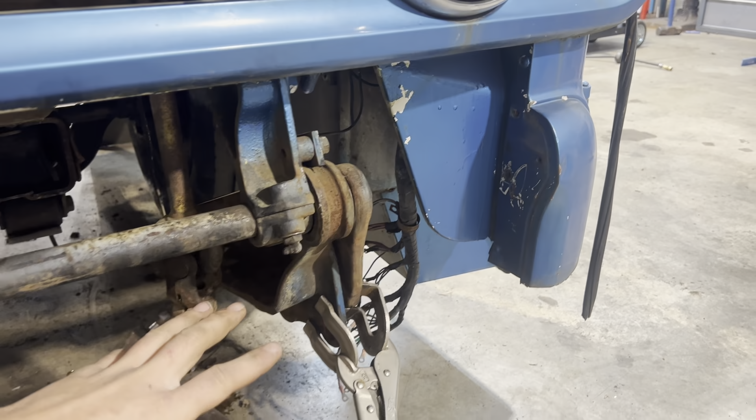All right, so if you have not been with us yet, this is a 1971 GMC COE cab. It was a fire truck. It has a hinge in the front to tilt the cab. That's how you used to be able to access the engine. That's how I'm going to mount it. So this is actually a pretty cool setup. So this is the torsion bar and the hinge. So this bar that goes across is a spring.

It's a torsion bar that basically how it's going to work is this bracket coming from the cab is hooked to the subframe, and it's not bolted tight to this bar. It's actually pivoting on this bar right here. So this is the mount to the cab on both sides. You can see that. And then this is a hinge that bolts to the frame. Notice that this bracket looks much different from this bracket. This one is completely different. It actually also locks the torsion bar in.

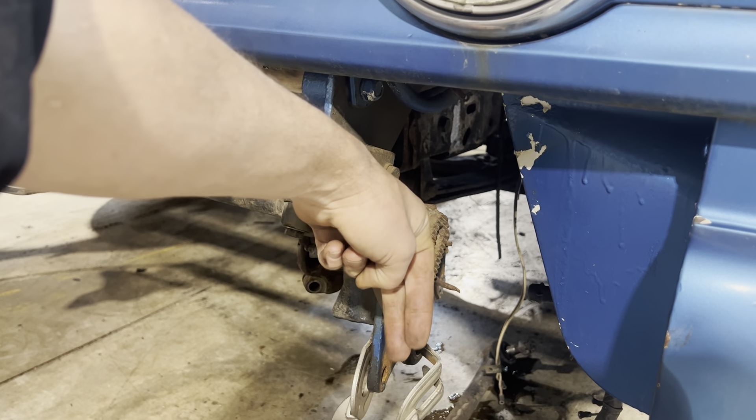So this link pivots like this as the cab tilts. So if we were to tilt the cab, this bar would go like this, and then we would be able to tighten it against this locked kind of serrated slot here. There's a piece of hardware that locks that in. And then once that's locked, well, the cab is tilted. When the cab comes back down, it will load this spring and take the weight of the cab. That's so that a person could tilt this super heavy cab up on its end because it's got that spring-loaded bar.

So, ooh, this is a dirty camera. Hold on.

Little better. So yeah, that's a very important bracket, and it's asymmetrical. It's not the same on both sides. So I've got to kind of figure out a way to make that all mount very strong, as well as this is our steering link. So it's telescopic because as you tilt the cab, this steering would get longer or shorter. And it is pretty close to where I want to mount the steering box.

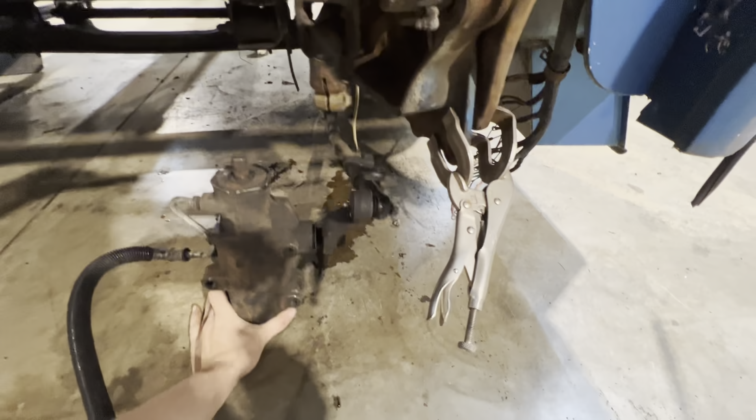So this steering box will be basically vertical, facing forward. These are the threaded holes that mount it. So right now those are facing forward. So I've got to be able to have a plate that goes sideways that I can bolt the steering box on. So my plan to start is to get a plate going from the outside of this frame rail that comes down. Might be able to see it easier this way.

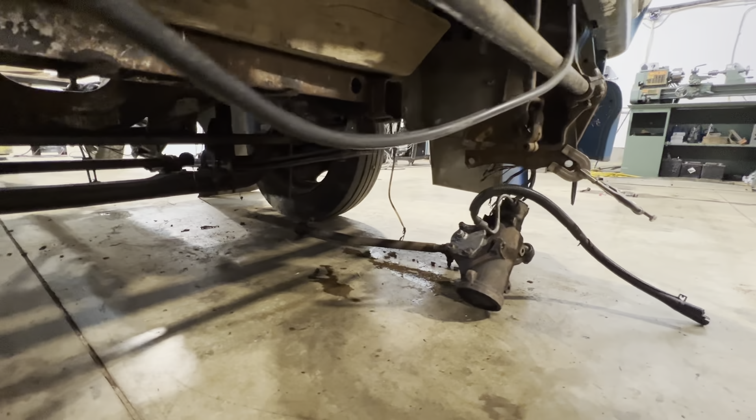So there's the frame. I'm going to make a plate that comes down and forward that would mount a bumper, but it will have enough meat in it, being our main source of strength, because it's going to be a 1/4-inch plate that comes down, has maybe a bend at the end so that the bumper can bolt on, and then I can build off the side of that next to get the top of this bracket.

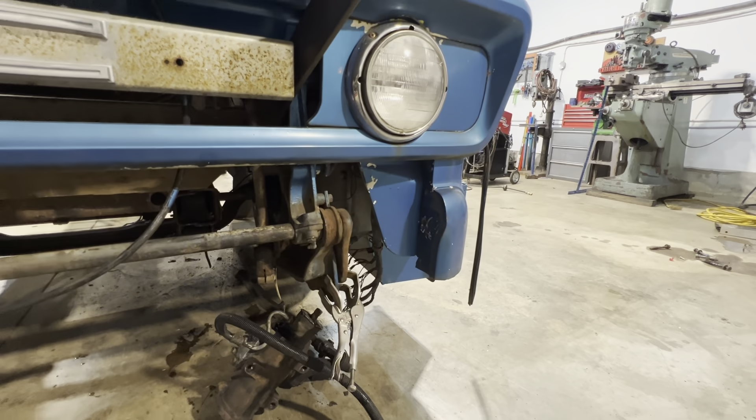So once that forward plate from the frame is here, I'll be able to make a plate and a template to make a side plate that bolts on to that part of the hinge and then somehow tie in these bolt holes. So one thing leads to another, and that's kind of how you have to look at a problem like this, or that's not how you have to do it, that's how I like to do it, is start with what you know.

I know I've got to mount a bumper. I know the strongest part of the frame is this outside piece here with 1/4 inch plate. So I'm going to make a main plate that the rest of the pieces can branch off of. And that goes for the steering box as well. I'll be able to figure out the steering box based on that plate as well.

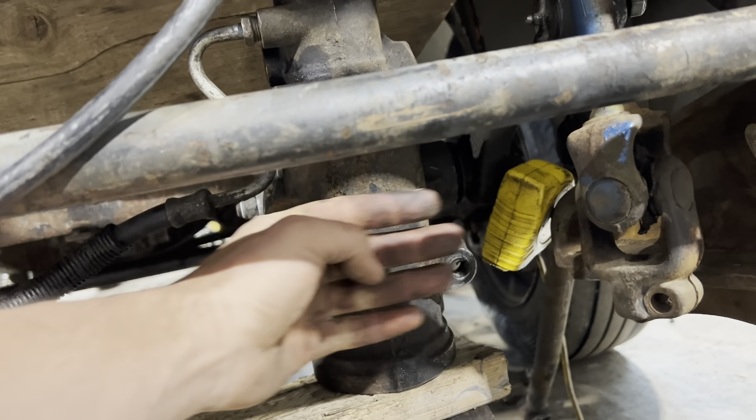Okay, so I kind of have the steering box mocked up where I would like it to be. So you can see it's turned sideways. The lines are coming out of the side of it. It's bolting on at the front. So I'm gonna have a plate coming off of this main plate that I was talking about that will mount the steering box, but I need this in place so that I can see where the hole will be either in the plate that I'm making or it'll be notched underneath to clear where that steering arm comes out.

So you can see that arm kind of fits nicely within the hinge here. I've got the steering box arm all the way forward, so it would be turning right at this point in time. So I've got it all the way forward so I can check the clearances around that hinge anyway. But that's where it's sitting. I've got it tipped forward a little bit. There's the steering arm coming from the top.

I'm not sure if that U-joint will allow it to go that far, but if it does not allow that much angle, then I will have to go to what's called a double U-joint. They have a little bit more angle allowed in them. So I think it'll be okay, but we'll have to see. This is, like I said, a telescopic arm. I'll have to shorten it and then put a different U-joint on the end. I'll probably end up welding it on because I've got the U-joint that came with this box as well,

and make an arm happen. But now that this is in place, I can continue making my template for this first main 1/4 inch plate that's going to come down. It's going to come in between the steering box and this hinge. It's going to come to the bumper mount, but I will build off of it to get these other strong points picked up.

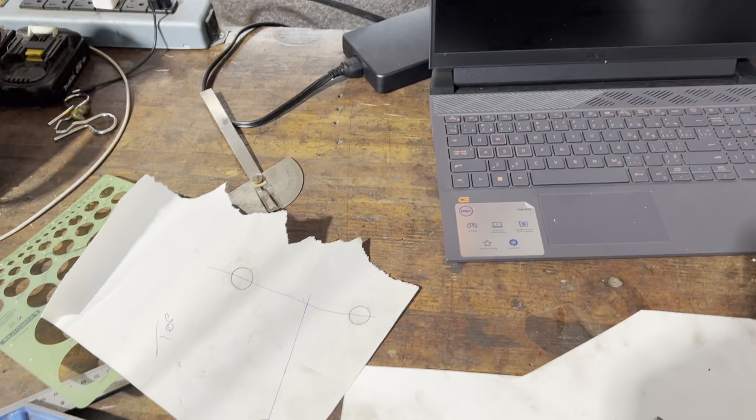So I also took a little tracing, a dirty finger template where you just rub your dirty fingers over top of the frame, and mapped out the steering box holes, and I've made a plate. Anyway, the drawings are for the frame horn, both sides of the frame, and then a center plate for the steering box, and then the other

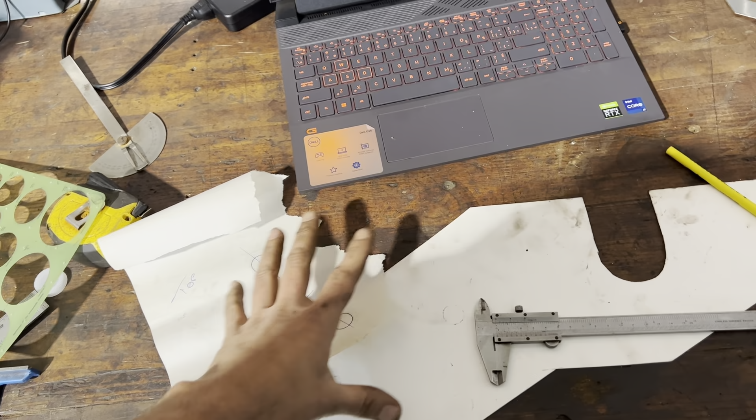frame horn is just going to be another bar, but what has happened is my other computer that runs the CNC, I think that when the power went out, I accidentally ran it on generator power and fried the power source. So I'm going to do a little bit more guessing and a little bit more drawing just by measuring tape and kind of feeling it out. And then I'm going to take all this stuff to ELIO, and he's going to bail me out tonight. He's going to cut everything out, and if it's close, I'll be able to cut it and finagle it and still be able to build the front frame rail and steering box mount.

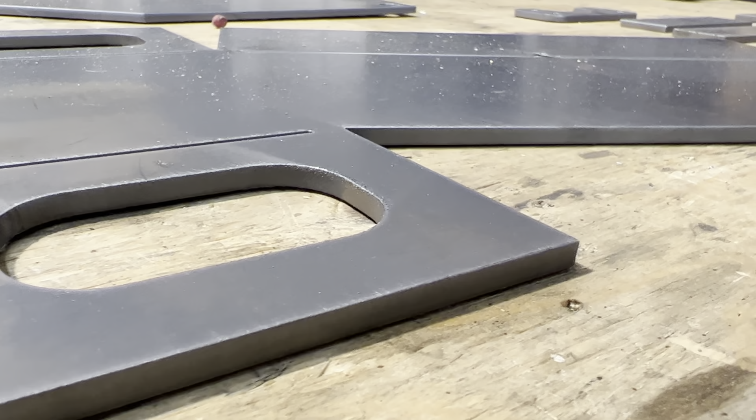All right, so a couple buddies bailed me out today. So I went to go CNC cut some plates, and I was only gonna do a couple plates and then kind of have a look and fit some stuff and then make some more patterns for more plates. I wasn't gonna try and do this all at once. And my CNC is down.

So what happened was, I guess when we had a power outage here and I ran the generator through the panel, I may have put dirty power or generator power through the power supply on the computer. So basically I didn't even know what was wrong with it. I called my buddy Rich, he's my CNC go-to guy, and he figures that my computer's probably okay and it just needs a new power supply, so I won't have to reinstall those programs and do that kind of stuff.

I have a really archaic computer that runs the CNC. It's got like the pin printer plug that plugs into the CNC, so it might be time to upgrade.

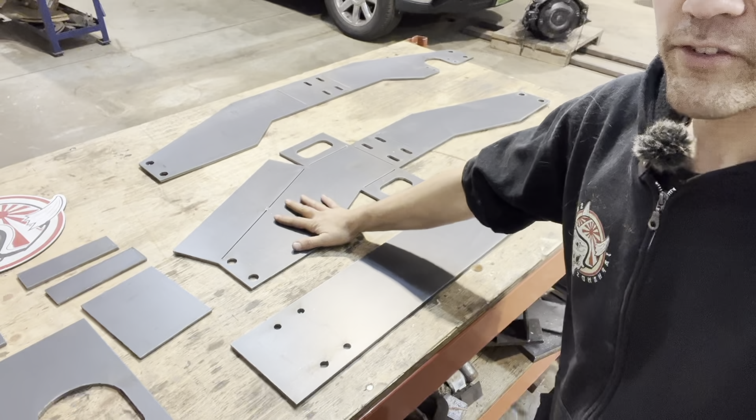Basically, I just drew that one template that you guys saw me draw, and then did a bunch of measuring and tried to visualize cardboard box flap style how to build these front frame horns. That's what this is. This will fold into a frame horn. This will fold into a frame horn. One of them is wider than the other because the steering box is meant to slip inside there. So I kind of made provisions for that.

Like this is where the steering box is going to come through the frame. And I made a little plate. I don't even know if this stuff's going to work, guys, but this is just kind of thoughts that I had. So we're going to see now. I'm going to stick this together and tack it all up.

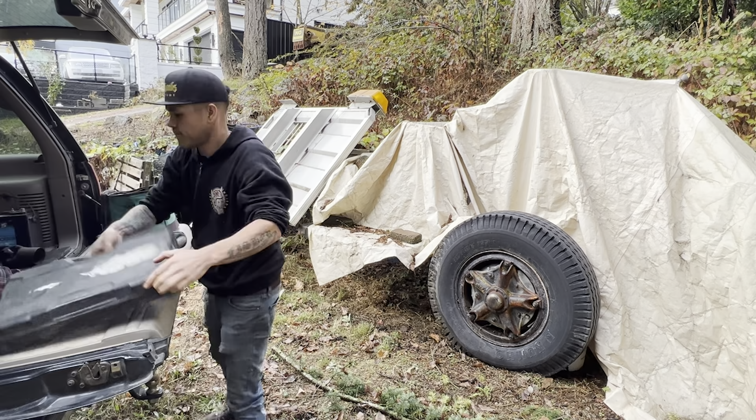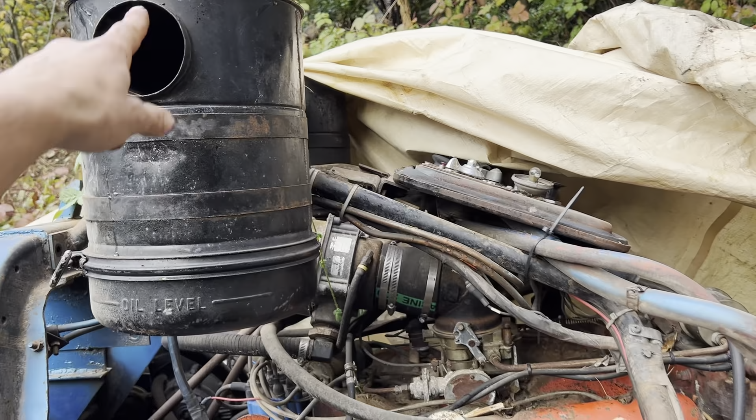Look at how massive this thing is, man. I don't know if you can even tell in the video, but it is gigantic. Like, this is 6 feet tall right here off the ground. That is a gigantic gas V8. GM's largest gas V8 they ever produced was in this truck. All in really crazy good shape.

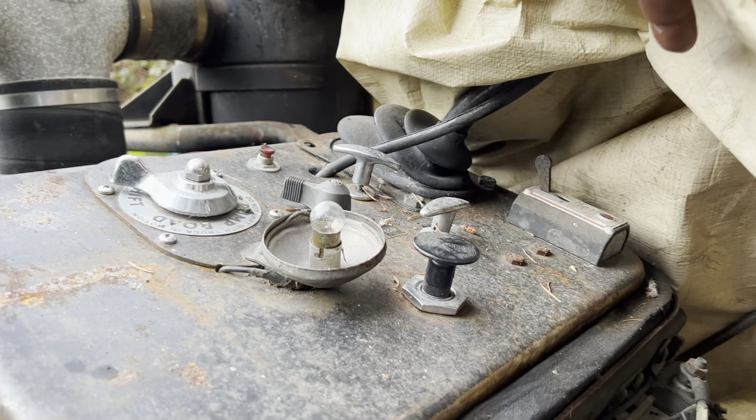This is actually inside the cab. This is like your splitter and your shifter and all that kind of stuff. Super neat. But this is the bar I need right here. I don't need the whole thing, but I do want this pin, this latch. So I'll just start cutting it off.

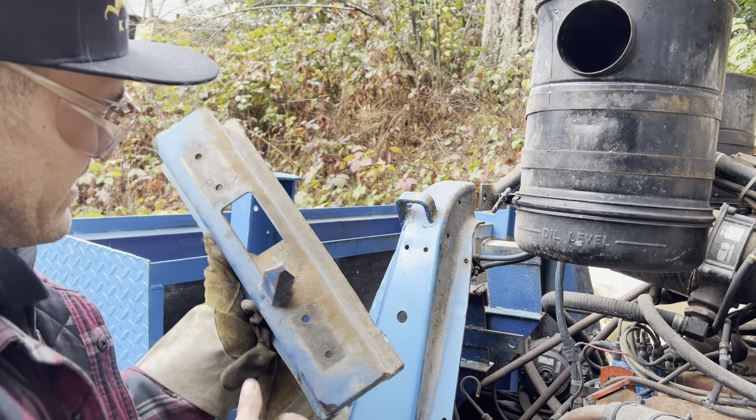Here it is, got the piece I needed. Saves me a bunch of time because obviously it's got the holes and mounting locations and dimensions of exactly what I would need to fabricate. So this is awesome. So thanks, boys.

It gets hung up on this little thing here. If I put it on faster, it goes. Very cool.

Man, thanks for showing me around again, Warren. Yeah. I really appreciate it. Yeah, it's a different kind of house here. It's just beautiful. Your work is amazing. Yeah.

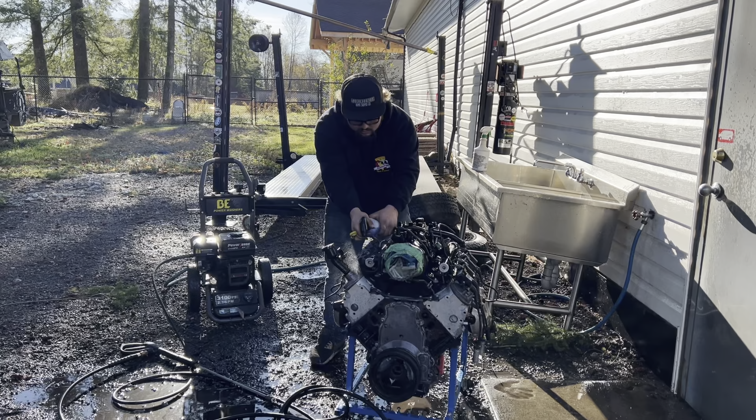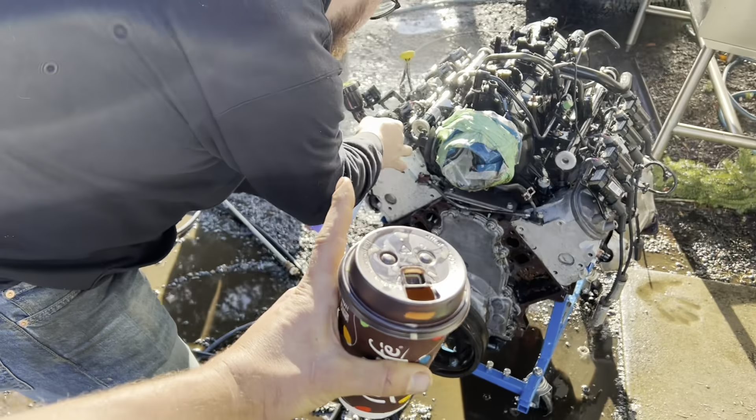What's that stuff, man? It's called the blue stuff. It's like an aluminum brightener or metal brightener. It just eats everything away, cleans it pretty good. He's alternating with that and the Super Clean purple stuff, degreaser. That's a metal brightener, so it's helping clean that aluminum and pull any of the dirt out. It pulls all of the porosity out of the metal, like all the oils and everything.

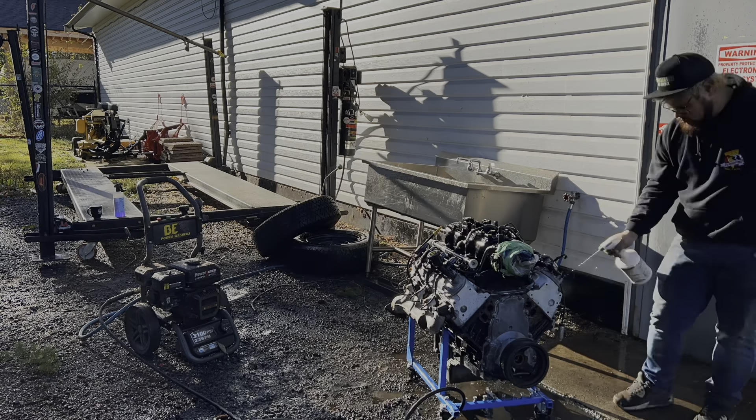Show up. Yeah, we're here. What's up, Brent? Esther, they're in the house.

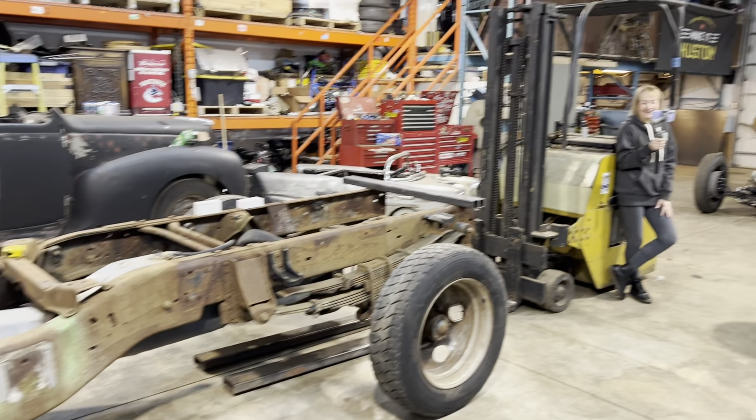Halfass in the house. So these guys just got here, and we are going over the cab over project. Elio and I just tucked the motor in last night. We just kind of stuffed it in there as a mock-up. But we're going to continue on mounting the cab and then go to the motor, and just keep ticking boxes, right?

Today, I think the main goal is mount the cab, have that solid, then we can take out any of the wood that's holding it up. Yeah, the goal is to get the cab mounted, and then we can work on the motor and not worry about the cab moving or getting out of lineup. That makes the most sense to me too. I think that's the idea.

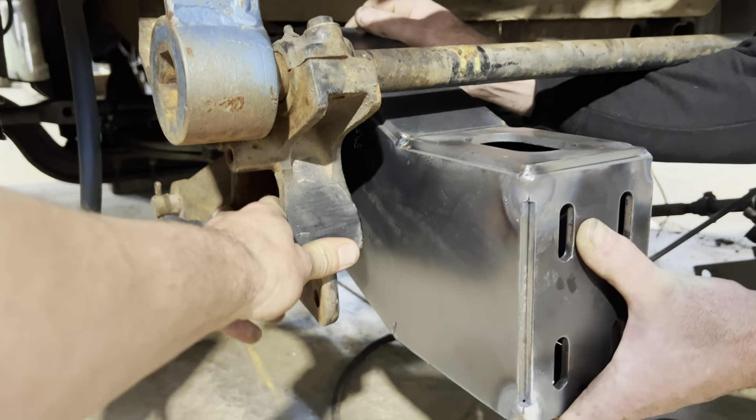So here are those pieces that I started fabbing up. We've talked about it a little bit and figured out how it's going to work. We're going to mount these mounts off the side of these rails. I think this is what you're trying to do. Yeah, you don't have two hands exactly. Right there. So this will be bumper mount. We'll make some kind of mount off the side of the rail for the hinge. And that's the cab mount essentially. That's pretty much it. So we're going to get started on that.

And then the back of the cab, we did scavenge that piece right there that clips onto the cab. Is this the one? Yep. That is basically the only chunk that I really needed. That has to weld to the frame down there, so we're gonna use some HSS and do that. So that's goal number one.

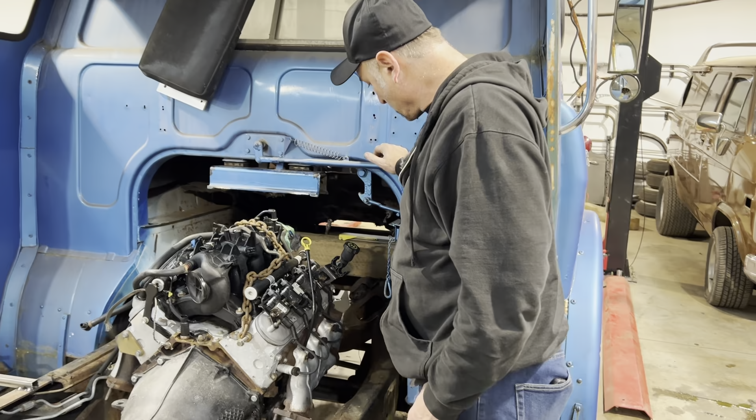And yeah, big welcome to Brent and Esther. They traveled a long way to be here. So excited. It's gonna be a heck of a 5 days, I'm pretty sure. So I think that's it. We're just gonna start to boogie. What do you think, Brent? Let's go. All right. I'm good to go.

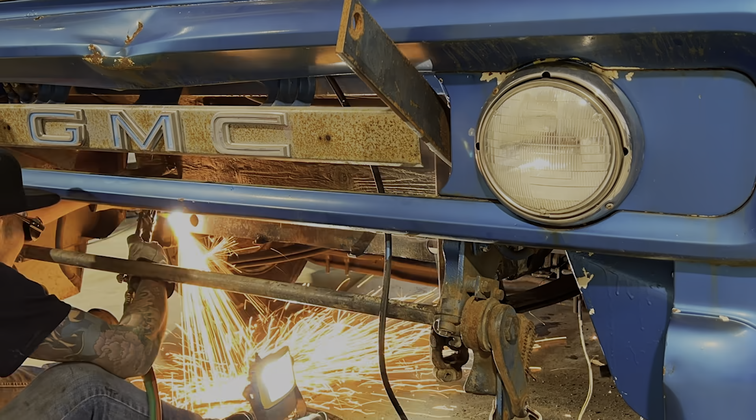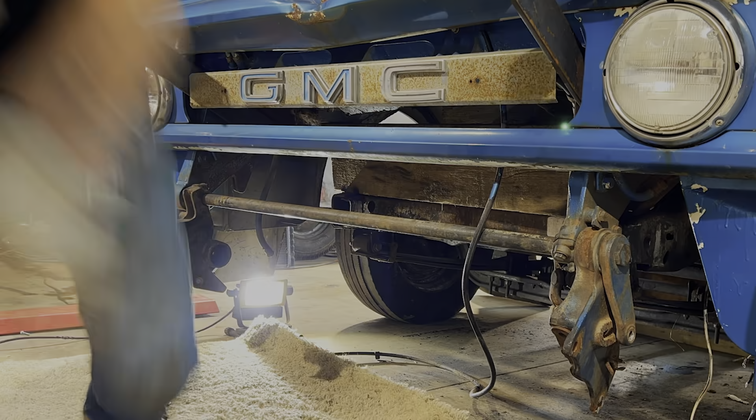So I'm just gonna grind and prep the frame a little bit and get these things tacked on. Just ground them up and get ready to mount on these frame rail ends. This frame rail is a little oddly shaped: 4 inches at the bottom, 4 1/4 at the top. Seems like a job for the persuader.

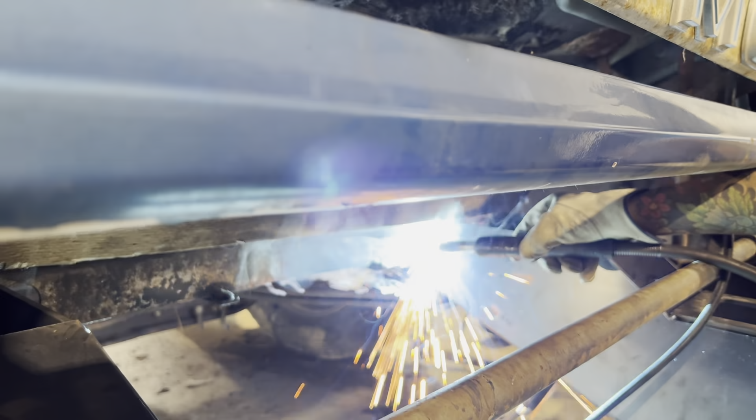Okay, so this is what we're thinking. Don't mind this. This is gonna end up being our steering link that goes inside the center here. But now I've just got to build a bracket that attaches this to the side of our frame horn.

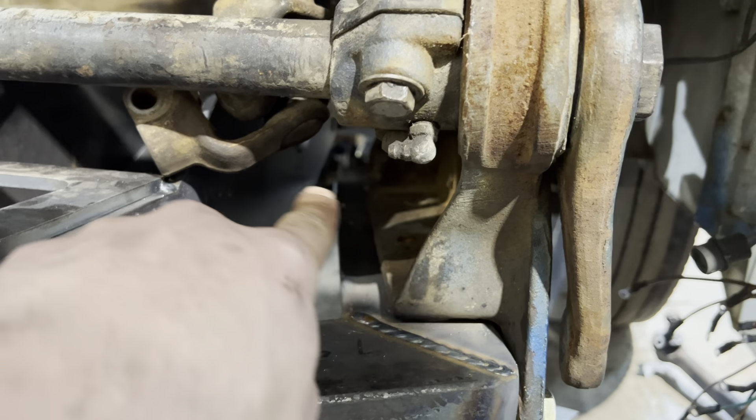But the funny thing is, look at the way the angle iron is here. That's kind of how the frame used to be on the old cab. But on this one, it's the opposite. It had the angle iron mounted on this side. So it's gonna be a slightly different asymmetrical deal. I'm gonna do the same thing on this side, but the angle is gonna be like this, and then I'll cap it. So they're gonna look different, but they'll work the same.

And while I'm on that, Brent's over here just petting dogs. Kidding. He's working on the back.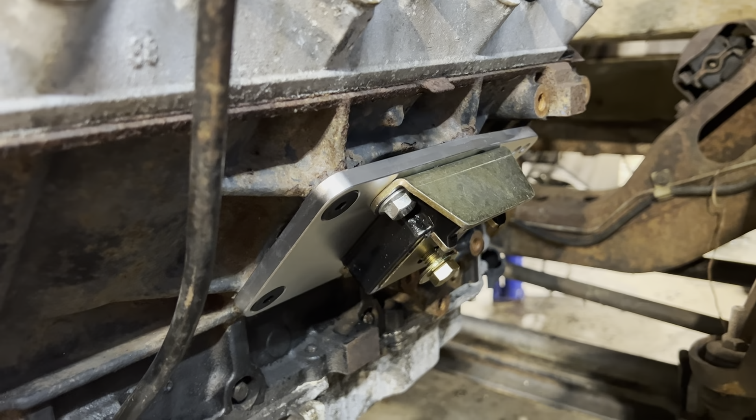He's got the motor mounts on, trying to figure out what we're gonna do next for that. Just got the adapters and little urethane mounts. Should be a simple little mount. His idea, we're gonna have it so that everything drops out the bottom. Good timing on the compressor, but everything's gonna be made so that motor and tranny, if it had to come out, could drop out the bottom.

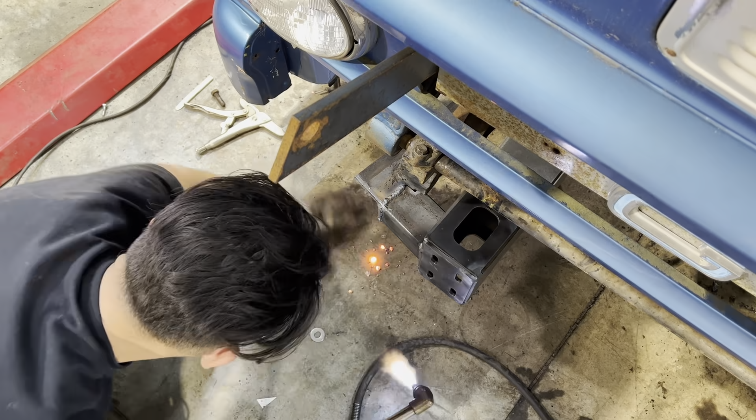So Brent's just cleaning up a piece to finish off the passenger side frame rail. I've just got this piece of angle here. I'm gonna put it kind of in here like that. I think that should grab the back, and then we can also put a plate on the side to close that in, and then we'll have optimal strength.

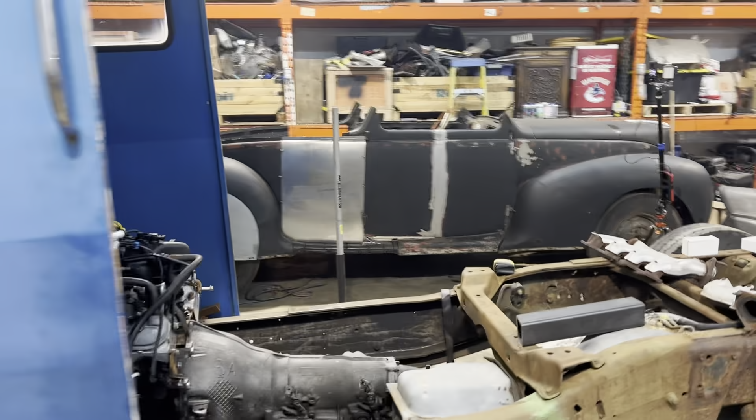All right, so front frame horns are on and we're mostly welded up. Haven't done the lovely underneath welding yet. I will do that in a moment, but we are ready to put this cab a little bit lower in the back so that it's nice and ready for the back mount. The front is at least on and pivotable. So now we've got to just kind of align the cab perpendicular to the chassis here, and then this rear mount can be made by that guy. It can if you've got Brent the gigantic farmer here.

Well, something a little interesting we're finding out is that the spring on the driver's side is sagged really bad. So now that it took the full weight, the thing's sitting crooked like this, so we're trying to align the back of the cab, but you can't measure to the floor. So it's looking better now that we've got it sitting up on jack stands. Truck's sitting level again.

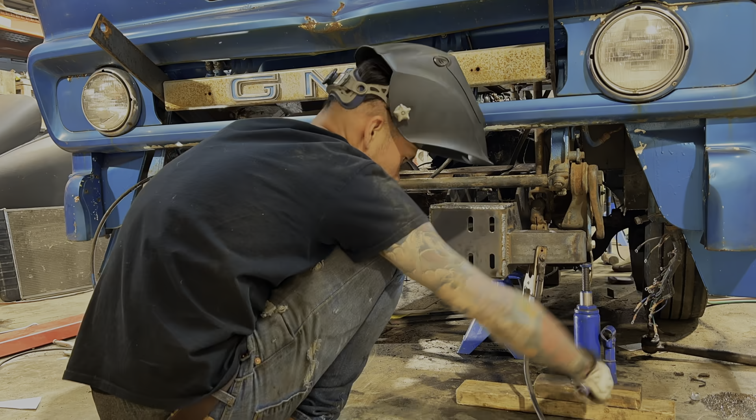I just added this little cross member in between the two frame horns just because the outside of this was kind of torquing. This big box is still open, so I think that'll hopefully help it. But next up, I'm gonna weld the bottoms of these, the fun job, upside down welding, and then try and add some structure into where this rail ties into the frame because it's extra wide. It doesn't get to tie into the side of the frame here. I'll have to add some kind of stuff.

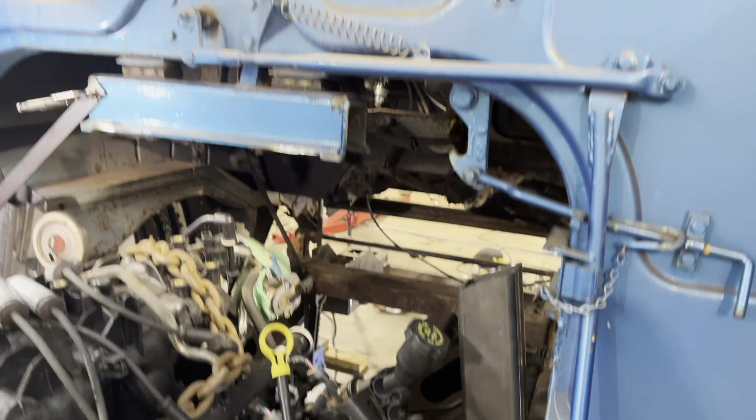Brent's got the back cross member all happening. 3x3 comes straight up from the chassis. Straight-ish.

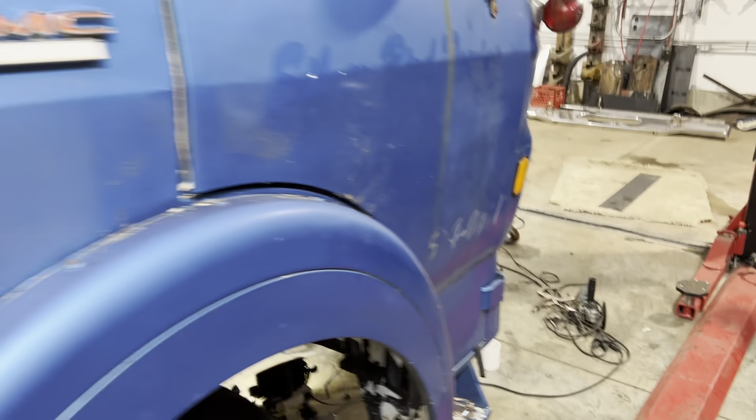All right, so what is going on? End of day one, we just had some dinner, and Brent has finished this wicked mount at the back. So the back of the cab is mounted. We are almost ready to tilt it. What I have to do still is finish strengthening up where it attaches to the frame. Now, Brent did a bunch of welding, I did a bunch of welding. We've got the frame horns that are fabricated, welded on all the edges. And now, basically, I've just got to tie this in to here.

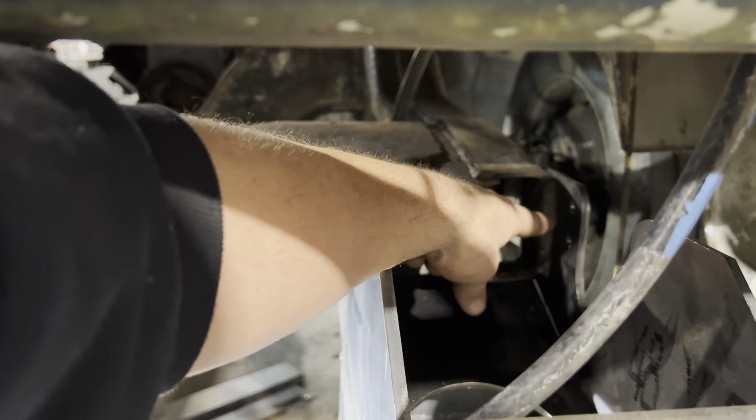So what I'm gonna do is I'm probably gonna build a gusset. This is a C channel that's open at the bottom, this right here. So I'll probably put a plate underneath, bridging and boxing that C channel, and then tying it into here. Maybe a little bit of an angle so that this load transfers more into this. Right now it's just this that's welded on and to this end of the frame rail. I do believe that I should definitely box this in and connect it as well. Then it will be strong enough that we can confidently tip this cab. And yeah, that'll be a milestone. End of day one, the cab tilted. That is the goal.

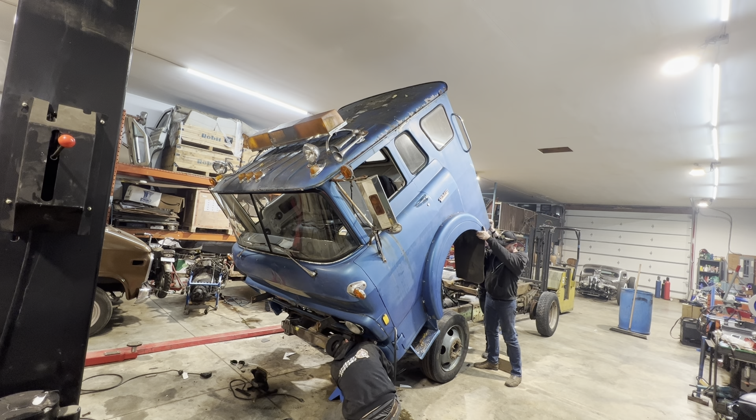I mean, you have another. Yeah, you're almost there. It's gonna hold itself right now. Is it? You gotta pull it, or is it gonna do this? It's supposed to hold itself right there. Yeah, I know. Does it lock itself or no? Do you want to keep pushing it? Let's do it right there.

That's the torsion bar as the safety. So I'll do the torsion. Well, for now, where it's sitting, Carl, if you grab a bottle jack or something, you can actually just put more effort in there. More effort in the torsion bar, right? Yeah, that's the idea. The torsion bar higher, so you have to work to lock it, it's gonna want to stay up. Right. But you should be able to lift it yourself.

Here. That's what you do in there. There's another 2x4 beside you. You guys scared? No, we're on the safe side of this. Yeah. Should I have been scared?

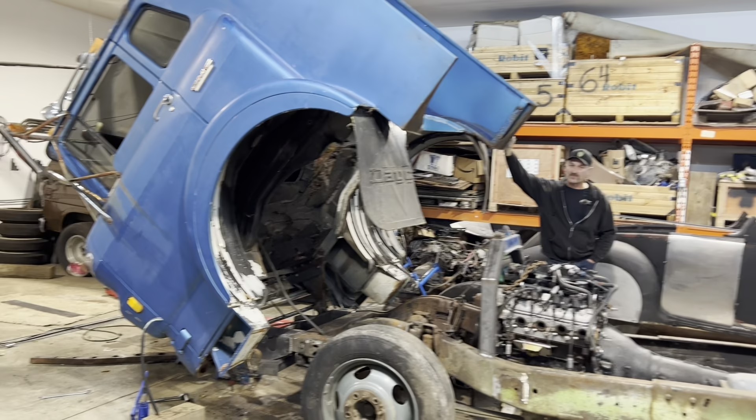Well, look at that. A bunch of buddies came over, helped us lift it, and we are good. The hinges work good. The back mount works awesome. Day one, we had to do a little bit of tweaking because it was bent, not working. We realized the torsion bar puts a load on the front, so we dumped a little of that tension, and then everything was coming down, latching right after.

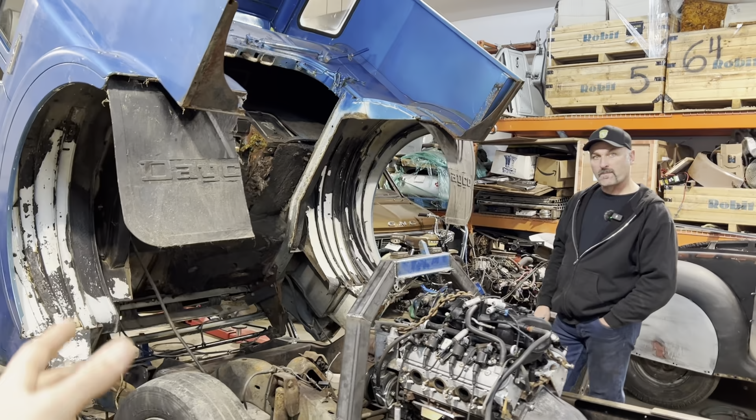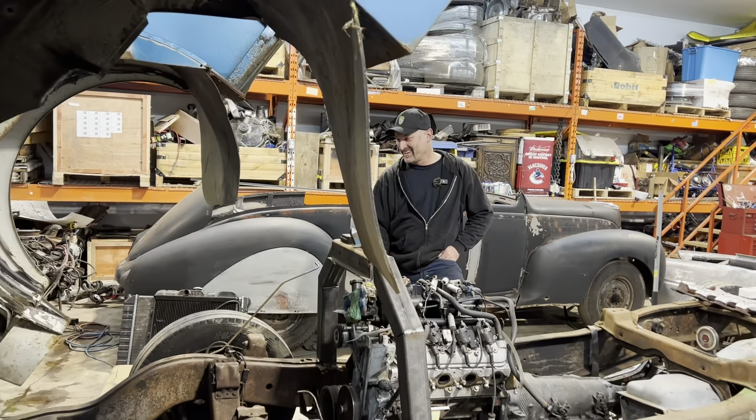I'm not sure if I even covered the struggles that we had. Everything was squared up to this pin back here. When we tilted it the first time and applied a bunch of torsion, the back of the cab ended up pushing over a little and not lining up with that pin. I was pushing for enough torsion that I could lift it with my pinky, but it's not quite that luxurious. So now it tilts, it works fine, but we took some of the torsion off so it lines up normal now, and it works awesome.

Day one is a win in the books, I think. Got the cab mounted. Our main concern, the hinge, the front of the frame, that's all done. Tomorrow we're gonna try and get it running, get it all mounted. That will be tomorrow's thing. I'm gonna call that a video. So, end of day one.